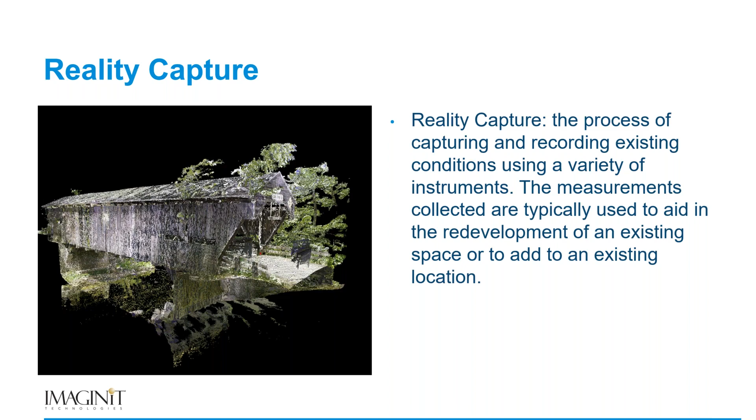And so, of course, we've progressed since then, and those measurements could be collected by any number of instruments. So at the end of the day, reality capture is the process of capturing and recording existing conditions using a variety of instruments. These measurements are typically used in aid of redevelopment of an existing space or to add to an existing location. And so let's take a look at some of the instruments that we might use to collect this data.

So right off the top, of course, I'm here with IMAGINiT. We are a reseller of laser scanners and laser scanning software, so that's of course right at the top of my list. So when we talk about a laser scanner, it's interesting to figure out the way that it works and what it can and can't collect. And we'll talk a little bit about that as we go forward.

Then we have photogrammetry. And photogrammetry, everybody always assimilates photogrammetry to, oh, I got to have a drone to be able to collect photogrammetry. And that's not necessarily true. If you're not familiar with the term, photogrammetry means that you're going to go out and you're going to collect data using anything from your cell phone or possibly even a drone for that matter, or maybe even a high definition camera. And you're taking those photos and turning them into possibly a point cloud or possibly a 3D mesh, or maybe even collecting survey data from it. So line work and points, individual points that we might bring into something like Civil 3D.

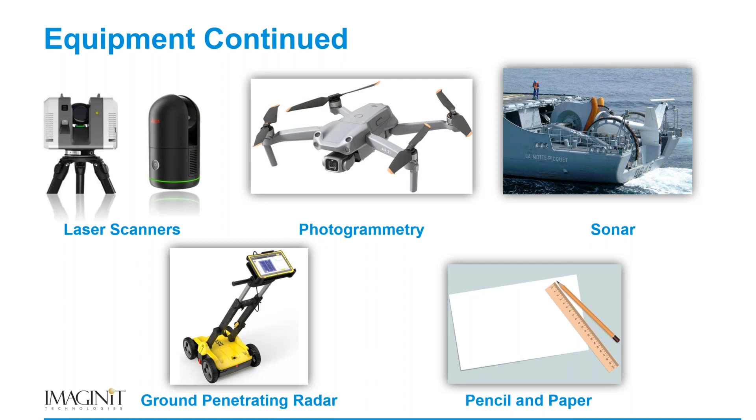All right, so let's talk a little bit about how scanning works and how you might use a mobile device to assist in your collection of data. Right? Well, some scanners are capable of using mobile devices. For instance, some of the Leica scanners are capable of using an iPad or an iPhone or an Android tablet to go ahead and collect data using their Cyclone Field 360 application.

This application, again, runs on a mobile device, allows us to log in, connect to a scanner, and simply be able to see what the scanner is collecting in the field. For those of you who maybe haven't had the opportunity to look at the newer scanners that are capable of this, maybe you're using an older scanner that does not, look into this. It's extremely valuable to be able to go out with your scanner, collect the data, and be able to see that data before you ever leave the field.

I know in the early days when I started scanning, we would collect the data and go back to the office, and it ended up almost like any other measurement, a tape measure, paper and pencil. We'd get back and go, oh, we missed scanning this area. Being able to use a mobile device to assist with that and seeing a representation of that point cloud with the pictures and of course all of the point cloud data, you're able to know before you ever leave the site whether or not you have what you need.

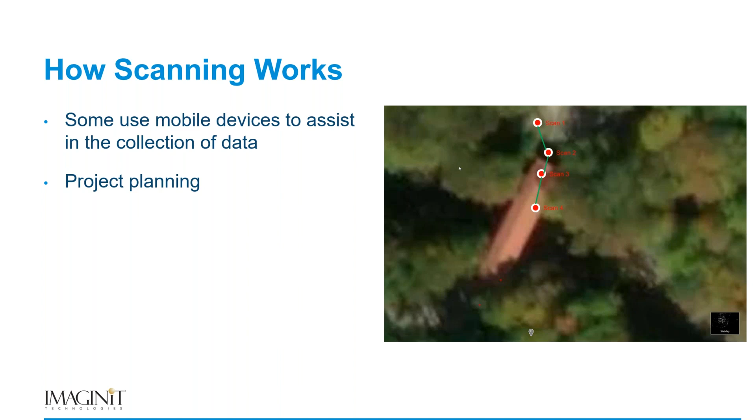All right. So when it's complete, it might look something like this, where I have all of my scans and they're all stitched together. By the way, that stitching process is called registration if you're unfamiliar. And all of that registration, if you've been around this a little while and are not familiar with the new stuff, we can do right in the field so that we're not spending extra time in the office trying to remember where everything went.

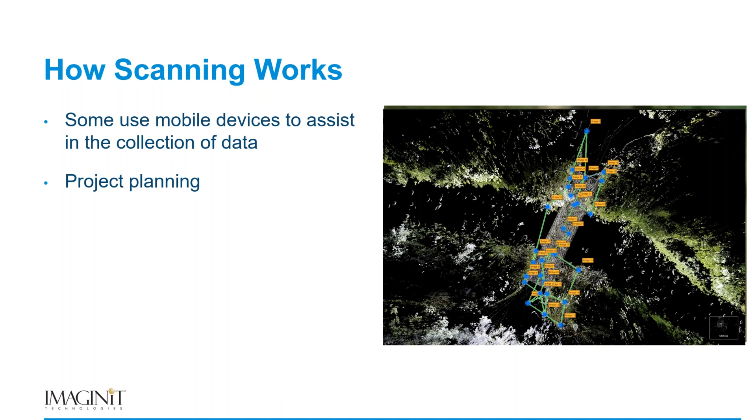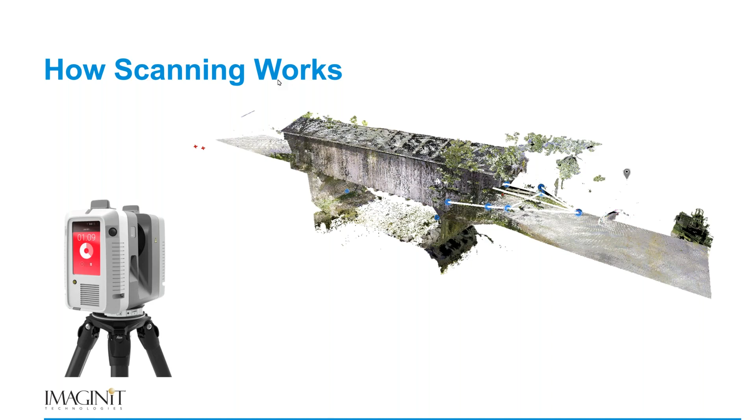So one of the big questions that comes up for a lot of people is, all right, I need point cloud data, but what do I ask for? I don't know what these things are capable of. Well, at the beginning, of course, you're asking for point cloud data. Everybody wants the point cloud data. Another thing that you might ask for is supplemental data. You see in the picture on this slide that there's a red circle at the bottom center of the screen.

A lot of these scanners today are capable of collecting supplemental project data, such as pictures, videos, text, and documents. That little teardrop icon in the red circle is what Leica refers to as a geotag. And that geotag is simply a picture I took while I was out there scanning this bridge. So I have supplemental data attached to my point cloud. So go ahead and ask for this stuff. Ask somebody to collect it, and they're more than likely going to be able to give you this.

And of course, the benefit here is that the geotags, or the pictures, the videos, the text, can all be placed in the correct location within the point cloud. So you're no longer walking out there by yourself with a cell phone, collecting a bunch of pictures that you're not sure where they go, and then getting back to the office, plugging your phone in, and not really remembering where all this went. It's in the point cloud, in the correct spot, so you'll never forget what that picture was of.

Okay, so what I'd like to do now is demonstrate for you how one of these scanners works. And the way I'm going to do that is I'm going to pull this down here like this, okay? And what you're looking at here is my iPad. And so with my iPad, I can go ahead and, well, before I get there, let me actually do it this way. Bear with me just one moment. I'm not sure how I'm going to do this. Let's try.

Okay. Bear with me one second while my camera gets up and running here. There we go. And so what we're looking at here, again, is my iPad. And if you look at my webcam here, you can see over my left shoulder I've got an RTC360, and over my right shoulder I've got a BLK360. And you can see that the BLK is turned on. I've got this green light on it.

And I'm going to show you how this scanning process works just by doing a quick scan through my home here. So when I open this Field app and I say to create a project, I can create this project and give it a name. Okay, and I'm going to save that. And now I can go into the project. Whoops, let me back that up. Connect my scanner first, my mistake.

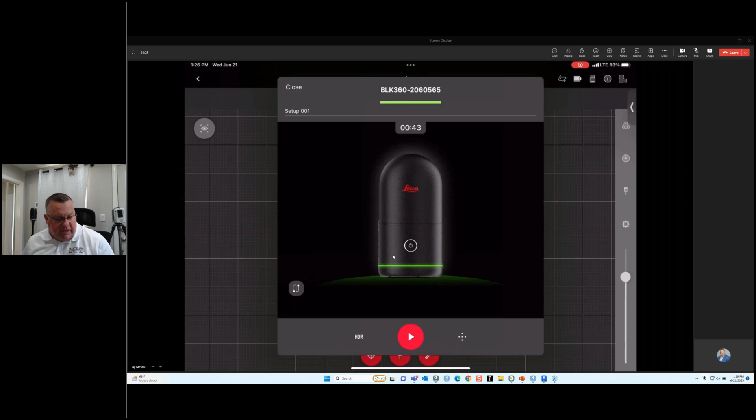And so I can come in and I can run my scanner simply by saying that I want to run. I'll do a quick low density scan here and maybe some quick low pictures. And I'm just going to hit play. And if you look over my right shoulder here, you can see that the scanner has started to spin and it's completing a scan. We have a quick picture, and within 43 seconds, this scanner is going to have a complete point cloud. And I'm going to see that in my field application.

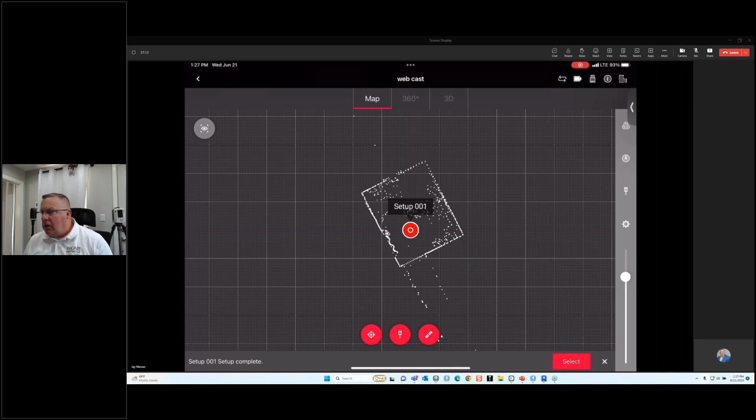All right, so the scan's complete, and if we're looking at the iPad, we can turn the camera off here a second and focus on the iPad and say that we want to take a look at our scan. So I can take a look at this in the field, and you can see me there in my office, and I can spin that around. Now, what I'm going to do is take that scanner and move it slightly.

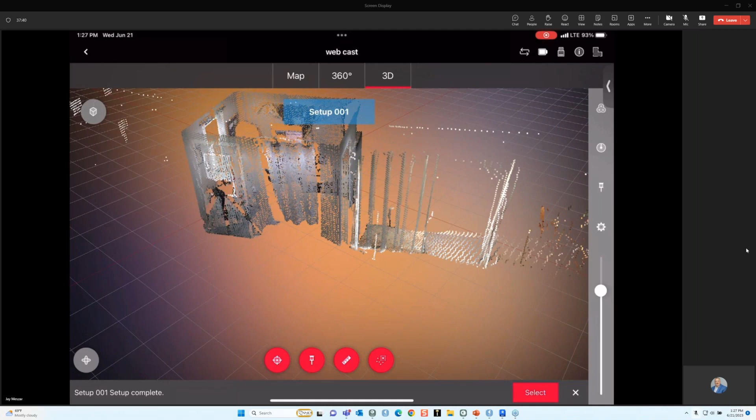Now you'll see that on my iPad here, I'm seeing a red blinking dot, and hopefully that's blinking for you. That's showing me the location of this scanner. So I know where I started scanning and I know where I am. And so we can go ahead and scan again.

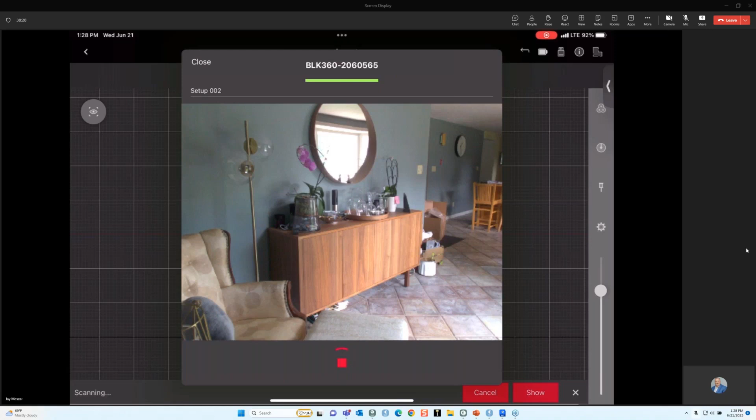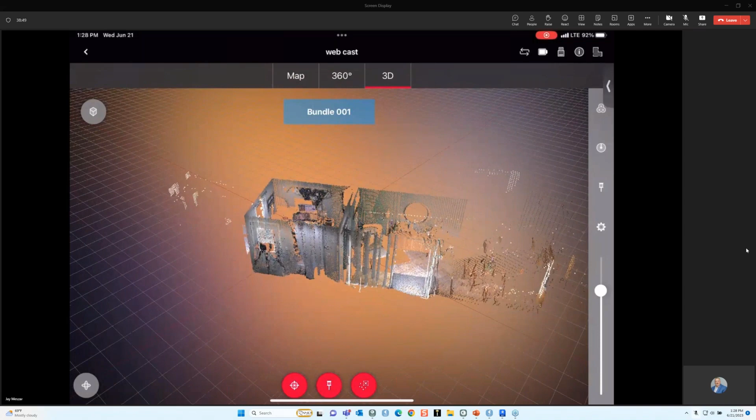Now, I've got my second scan, and as I said earlier, I can stitch these together or register these together simply by hitting a quick link button, and now I have two scans that go together. And I can continue going on and going on. Something else that we can do is we can click on an individual scan and we can look at its 360-degree photograph.

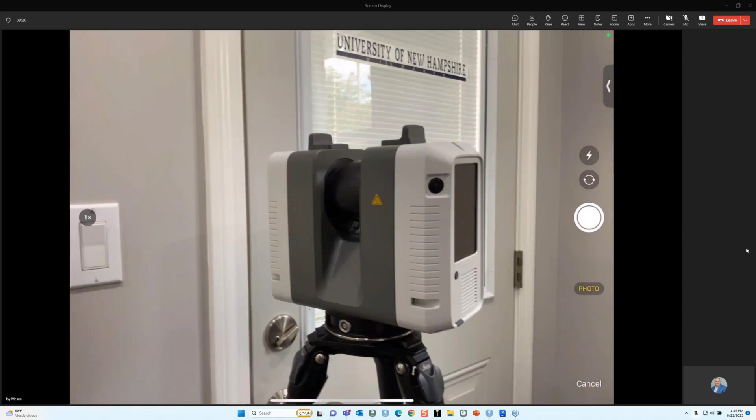And so remember earlier I was talking about collecting supplemental data. Well, some of that supplemental data could simply be me going in and creating a picture of my RTC 360. And I'll say, I want to use that photo. And as I mentioned earlier, I can attach this in the point cloud so that when I import, that data comes in and I can look at those pictures.

Okay, and then of course, we can go on and on, scanning our entire project, providing ourselves with point cloud data. Now, you may look at this and kind of say, well, that's not as many points as I had expected. And you would be correct. Because I'm using a mobile device, it's not going to load all of the points collected. So I'm getting a representation of what that final point cloud looks like. And then when I import it to the computer, I'll see the full point cloud.

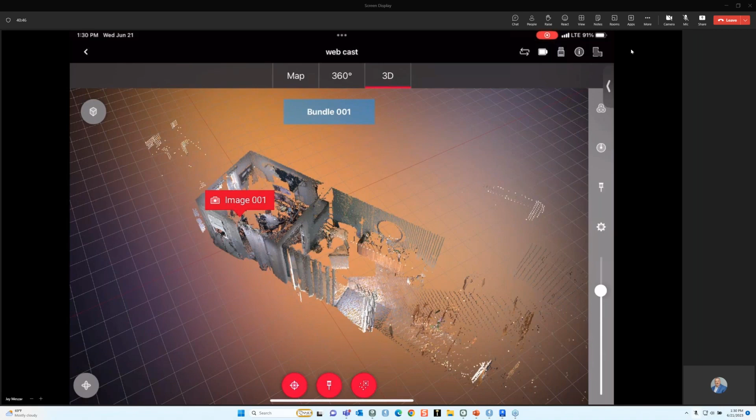All right. And so I'm going to then take that and we're going to move that out of the way. And I'm going to open the registration software. And I know some of you are thinking, well, I'm never going to do this. That's perfectly fine if you're not going to collect the data. But again, you will know now what is possible. And so you can ask for something and know what you're asking for.

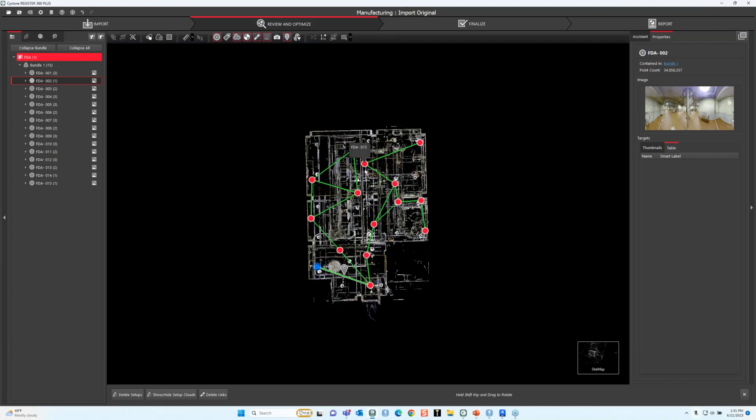So when I look at this data inside the software, of course, I would have already imported at this point, just to kind of catch you up. Sometimes the data is large and I've got almost 15 scans here or so. So I'm not going to do an import on this webinar. It will just simply take too long. But I can come in and I can look at my point cloud in 3D. And we can wheel around and figure out where we might add new data.

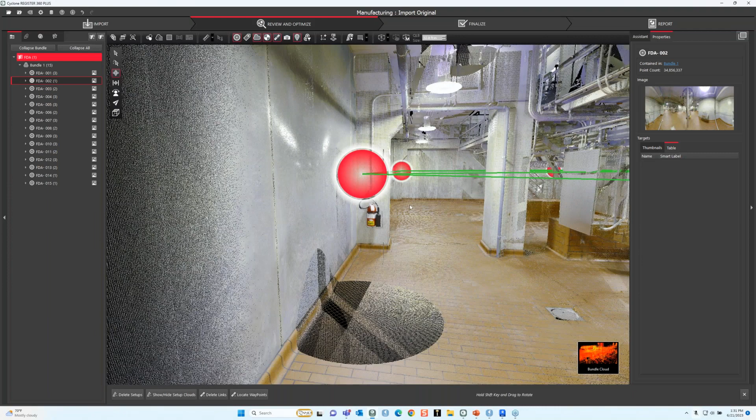And so we can then click on each individual scan and we can view the 360-degree pictures from that data. If measurements are what we need, we can simply come in and create a measurement. Okay, so we have all of this.

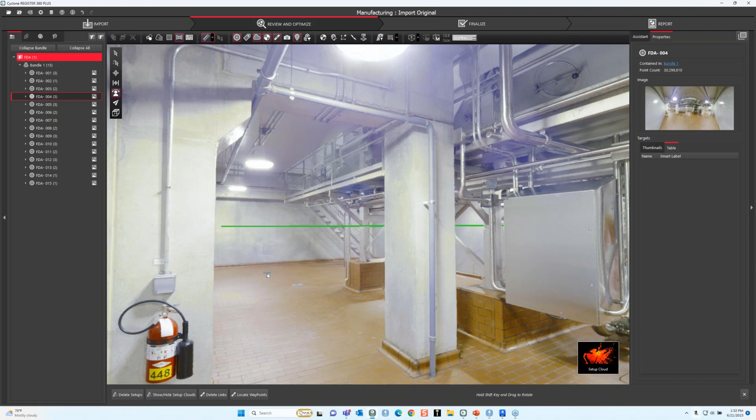And now let's just say, for argument's sake, you asked for that supplemental data I mentioned earlier, and for whatever reason, somebody forgot to pick it up. That's okay, because you could take any pictures that you did take from your cell phone, or any pictures that you might have found on the internet or whatever, and you can come in and you can create those geotags anytime you need to, just right here in the software. You don't have to have a scanner. Okay.

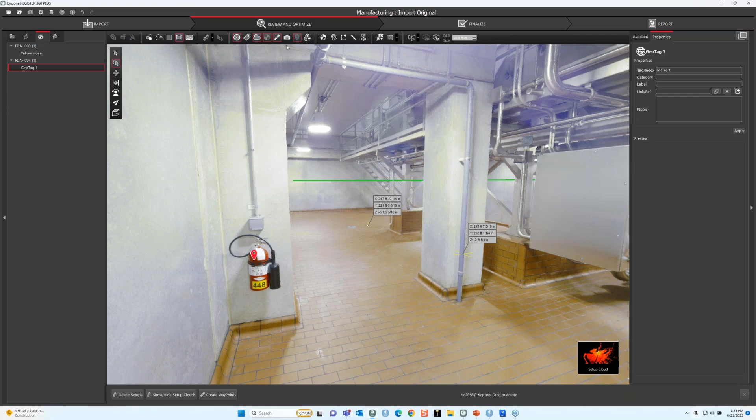All right. So once we're done in here, we're going to end up exporting our data out into a format that people can use. Again, we want people to be able to look at this, and those formats you can see here. Now, different scanners provide different formats, but ultimately these are some generic type formats. This is the Autodesk format, RCP, and then of course this is a workflow format.

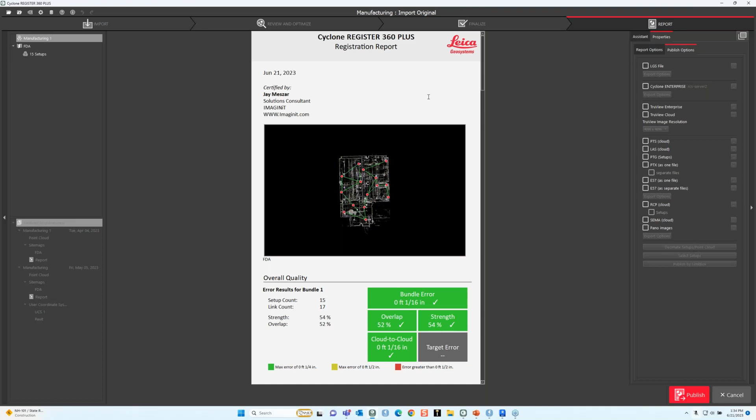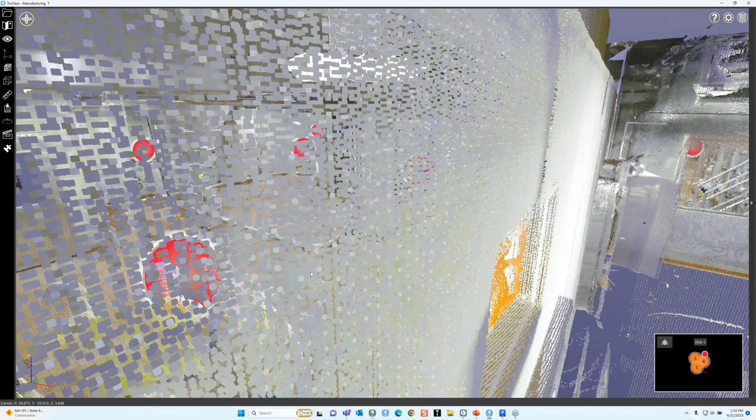And so now let's move on to, okay, you get the point cloud. Somebody's already done all of this for you. What do you do with it? What kind of deliverable can you create from this? Well, the very simple deliverable that we might create is coming into that free software I mentioned and looking at our data. Now, again, remember that this is a free software. And so we can come in here and look at this LGS point cloud data.

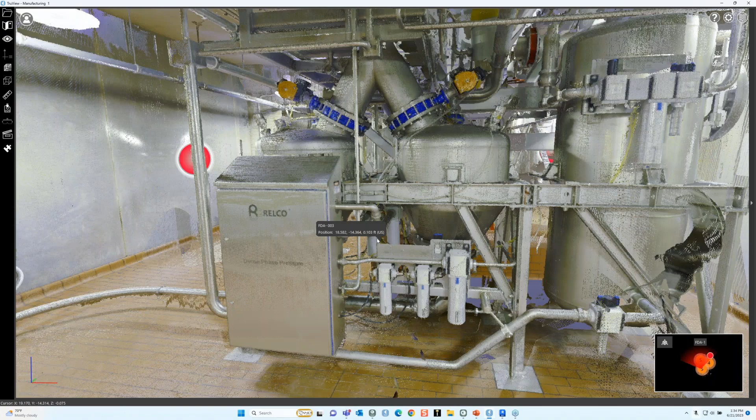And once again, we can take simple measurements. But beyond simple measurements, you might decide, I really want to turn these things off, first of all. Well, actually, let's just go in here like this, right? And then the deliverable might simply be something for somebody to take on site and use as a reference. And if that's the case, we can create what we call a snapshot and then create dimensions.

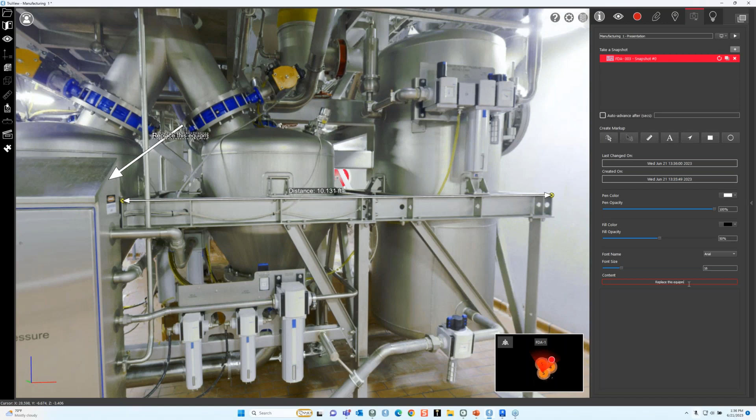You can place simple things like notes. Whoops, I don't want that one. And then maybe even decide, hey, at the top of this, I'm going to place some text. Okay, so we have all kind of options here. Anybody who has the free viewer, if there is a geotag created, they can go ahead and look at that geotag.

And then ultimately, if they have model data, it can be dragged in here and placed over top. I don't happen to have one for this data set, but model data can be dragged in and placed over top of this. If we really want to get fancy with this, we can take it and put it into some VR goggles.

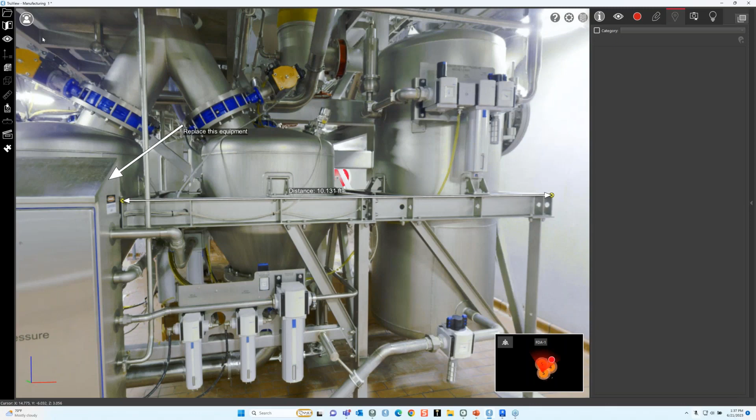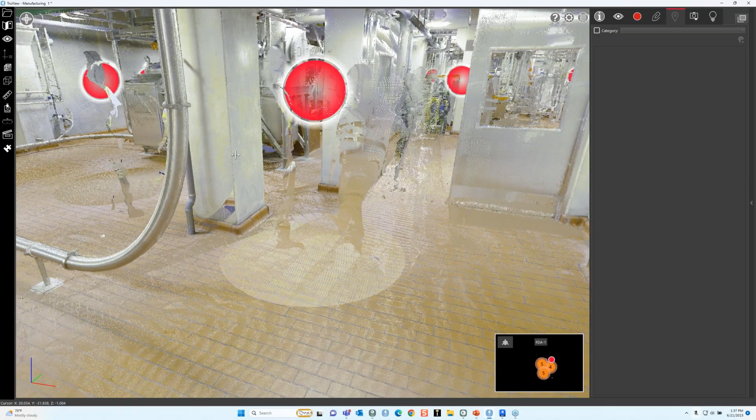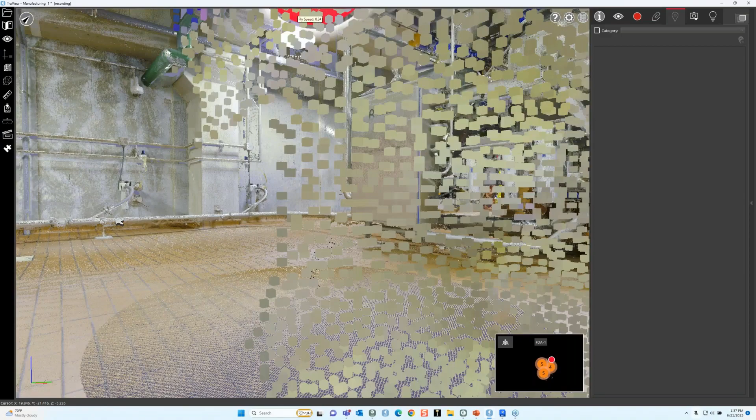Or if we simply want to give somebody the idea of what it's like to walk around this space, oops, we may come in here and start, let's say, right in here, and we may record a video. Okay, and so when we go to record the video, we start walking around the space. And I can speed this up or slow it down as I walk through the space.

Stop. And now I have an MP4 file out on my hard drive that I can email or put into Dropbox or what have you.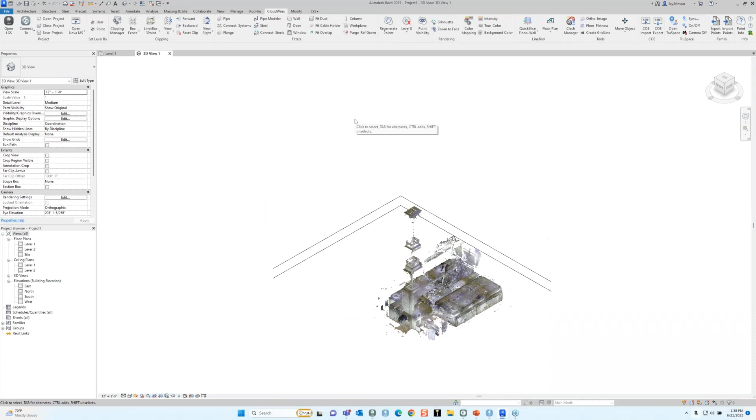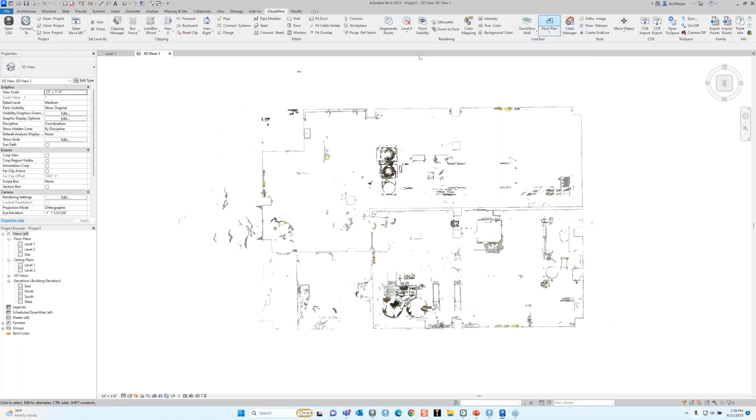Now, the last thing I want to show here quickly is what happens if you're using something like Revit or AutoCAD. One of the things that we can do is to come in and clip our point cloud. And you can see that I'm now looking at a floor plan of my entire point cloud. And then I can use some available tools to adjust that clip, move it up, move it down, whatever I feel I need to do, right?

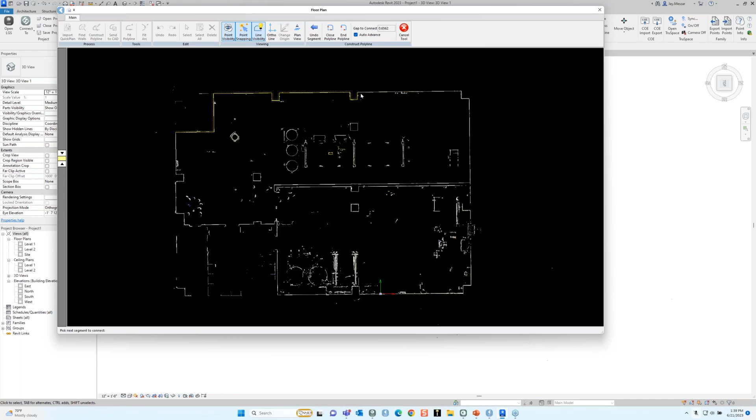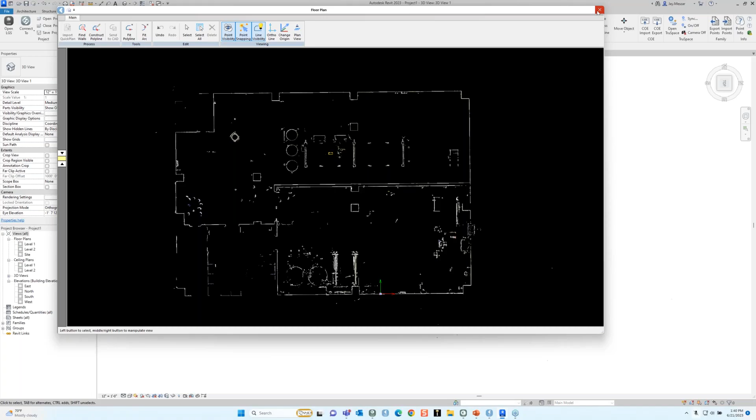And then start clicking on individual walls, and let's just say we go to right here and I decide that that's all I want to model for now. I can end that polyline and I can send that over to Revit using my levels, using a wall thickness and a side. And when I click OK, I can then close my dialog box. Whoops, and Revit minimized. Awesome. There we go. And I now have model data from my point cloud.

So there are a number of things that we can do with this point cloud data to simply get information or model from it, or use it to our advantage, as opposed to a tape measure and a pencil and piece of paper, right? If somebody gave me all the measurements for this building, I would have a very difficult time closing this building with those measurements. If you've ever tried it, you know what I mean.